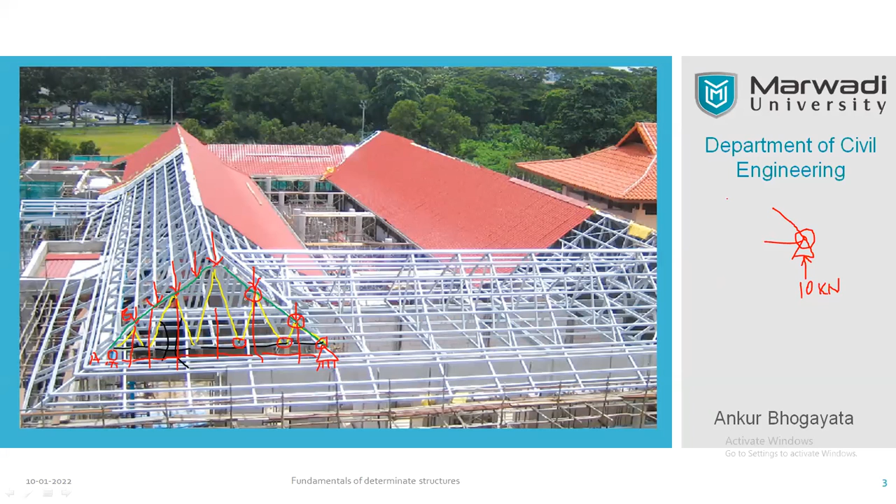So this is one joint that you develop here. Likewise, every node is a joint. Like this is a joint, this is also a joint. This itself is considered as a joint. You can go to each of the joints one by one, and that will give you equilibrium equations. And here we need to use only two equilibrium equations, that is sigma V and sigma H. One by one we can check them.

So here you can see with the geometry you can calculate this angle, right? Let us say this is 30 degrees or something, and we will convert this member itself into the forces, and we'll assume, unless otherwise stated, in case of method of joints, all members are in tension, so they should be going out from the source of the connection. So this is one member, this is another member. So now we have converted that member itself into the force.

So this is, let us say, force 1. You can name it according to the points, like suppose this is C and this is D. So you can call this force CD, right? And you can find whether it is in compression or tension. If your final answer is in minus, then you can say it is in compression. If your final answer of FCD is positive, then we can say it is in tension.

Because we all know that compression will reduce the overall member dimension, and plus will be extension of dimension. So that is positive, that is tension. So if this FCD value comes in negative, we will say that it is in compression, and if it is in plus, we'll call it tension. At the same time, as usual, when you get your answer in reverse direction, you can flip the direction of the force into the reverse direction. So you can convert tension into compression according to the answer that you have received.

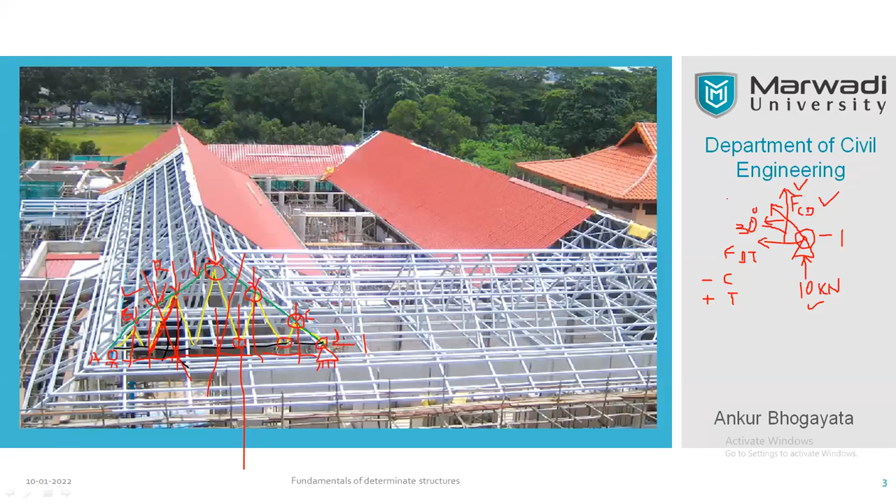So it is needless to add that if the truss is a very small structure, like only few members are there, only few joints are there, then definitely you can utilize the method of joints, because you need to address all the joints together. If the truss is large in the number of members, then specific member forces can be calculated by using method of section in that case. And likewise, we can use graphical method also. So with this introduction, let's move ahead in our discussion. Let's see how the thing works, right?

So all these are nothing but a good triangle. Let me take you to the geometrical. Since it is the first lecture, I am elaborating a little bit. So here you can see a closed triangle like this, right? Here another triangle is there, right? Here again, you can see a triangle, right? And likewise, it is symmetrical on both sides along the vertical axis. So likewise, all the members are ultimately arranged in a triangular pattern.

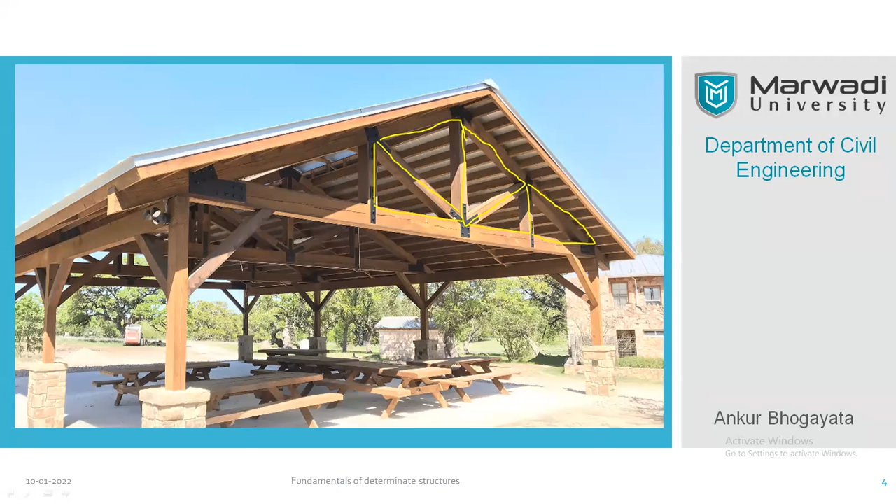So what we can expect is you will be given point loads at these locations. These are called joints. Where they are meeting, this is a joint itself, right? So at each top joint, you will be provided the point loads, and here there is a last joint, so you can expect forces here also. And then you can calculate member forces as I have just explained to you.

You can assume that one end is, let us say, supported on a roller, and the other end has a hinge support. That's why you can solve the entire truss, because then it becomes a determinate structure. So likewise, all are arranged in a typical triangular pattern. Once you have the forces, suppose you have the force in this member, you can treat this joint and get the other unknown values, like here and here. So likewise, we have to carry on. Okay. So let me change it.

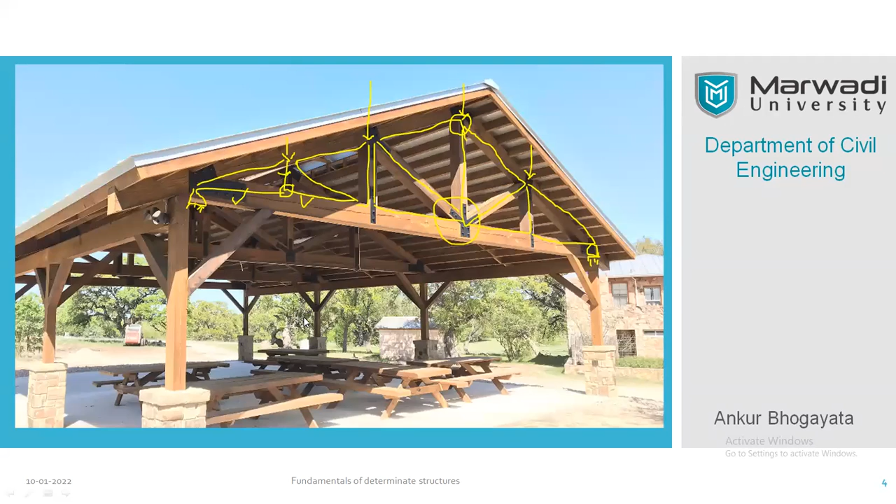So to articulate a roofing system in malls, airports and other places like railway stations, where you don't actually want vertical members to support the roof, you can utilize the truss system in an articulated way or in an industrial way also. Industrial sheds are the best example of the truss system, and you can search on the internet and find plenty of images there. So I'm just giving you an idea.

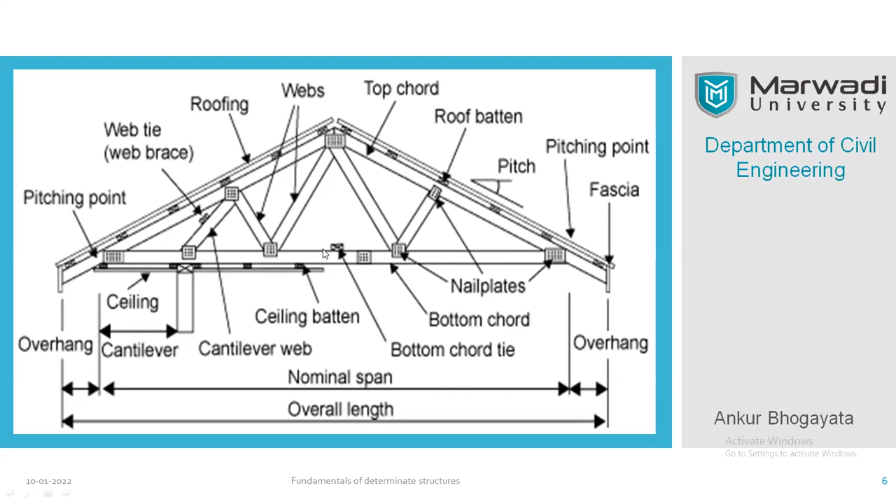So I have mentioned all the important terms earlier, like bottom members are called tie members, diagonals, and top chords. There are some other members you may find: the roofing sheet is there, and purlins are also there. These terms largely match the timber truss system. There's no need to remember all this. But I will be sharing some reading material and sketches with you, which give you a clear idea of the basic members and their names in the truss system.

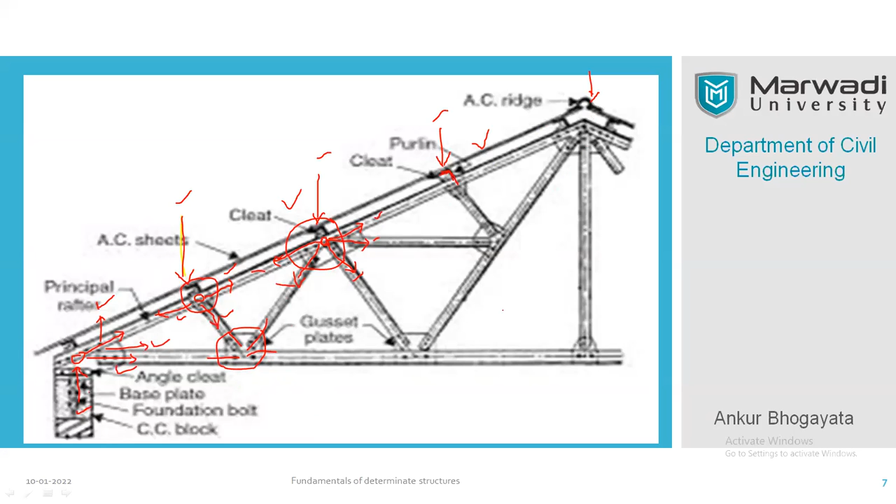So all member forces are easily calculated with the help of two primary equations, sigma V and sigma H together. This is the general idea of how we work with trusses. A truss consists of straight members connected at the joints. No member is continuous through the joint. Here you can see all are pin connected. These members have pin connections; this is one individual member, 2, 3, 4, and 5.

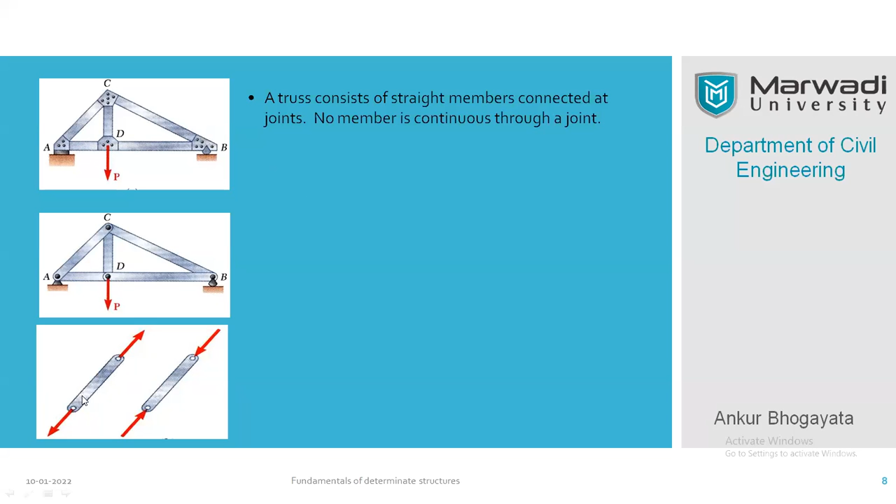You can recall when we determined internal and external indeterminacies of the two-dimensional truss system, we used the equation 2j minus 3, right? You can use that equation to check whether the truss is stable or not. And this last figure indicates how the members are subjected to tension and compression.

Most of the structures are made out of several trusses joined together to form a space framework. That means when you add some rafters, you can connect them. Each truss carries those loads which are in its plane and can be treated as a two-dimensional structure, right? And there may be bolting or there may be welding depending upon the convenience of the construction.

If you use a bolt, it will look like this, right? Just to connect these members together. This U-shaped element is called the gusset plate, and the gusset plate is used to give connecting area, and that will be used for connecting the members at a joint. If you have a welding facility, you can use it to join these two members. However, a gusset plate will also be required over there.

And finally, when the forces tend to pull the member apart, it is in tension. Like here, these two forces are trying to pull the member apart. When the forces tend to compress the member, it is in compression. So here you can see in the other figure where the cursor is moving, these two forces are compressing this member, right? So there is a combination of tension and compression together, right?

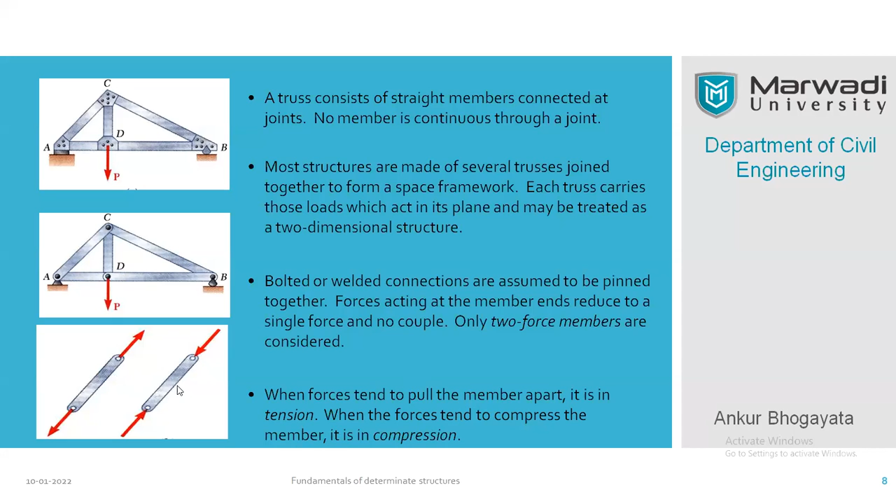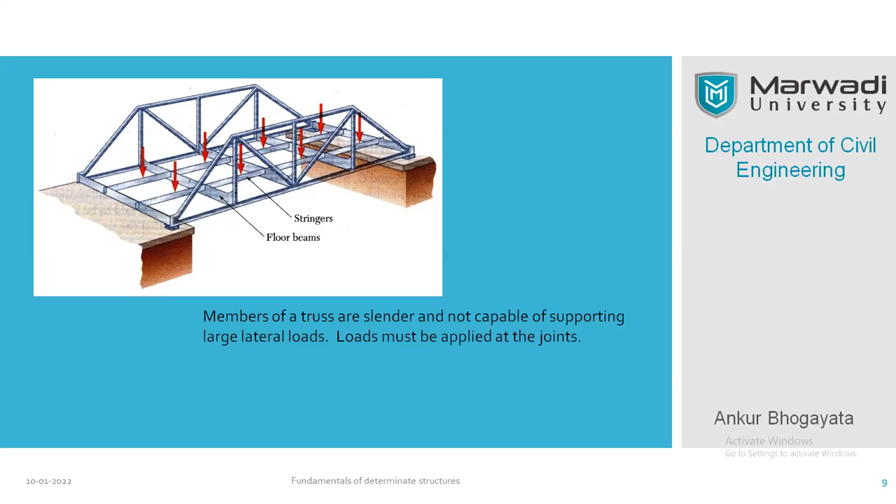Another application of the truss system is the transmission tower also. You can use it in cranes also. Several times we have discussed this. So now our focus will be how the members are subjected to various forces when you apply the point loads over there. So these are some of the examples of different types of truss systems. Each truss system is connected by pin connections, as you can see. So all these connections are pin connections.

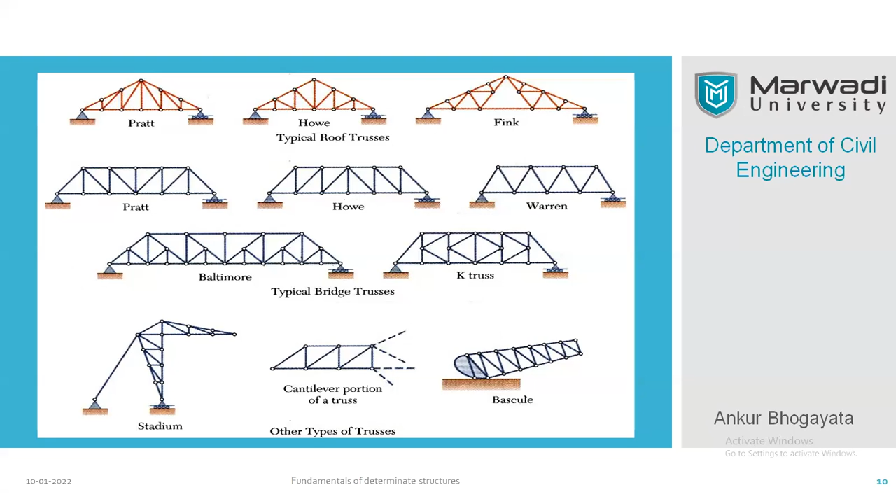So the most stable shape considered in a truss system is a triangle. You can use this triangle in a flip-flop way also, extending this geometry again and again to create members for large span structures. So there are stable and unstable mechanisms. However, we recognize this as a simple truss. The simple truss will be the point of our interest, right? So you can confirm whether the truss is a deficient truss or a perfect truss using the old equation.

2j minus 3 equals m, where here instead of n you can use j. J is the number of joints. So 2j minus 3 and the number of members, both part A and part B, should be equal; then your truss is called a perfect truss, right? And if it is not matching, you know what the other two conditions are.

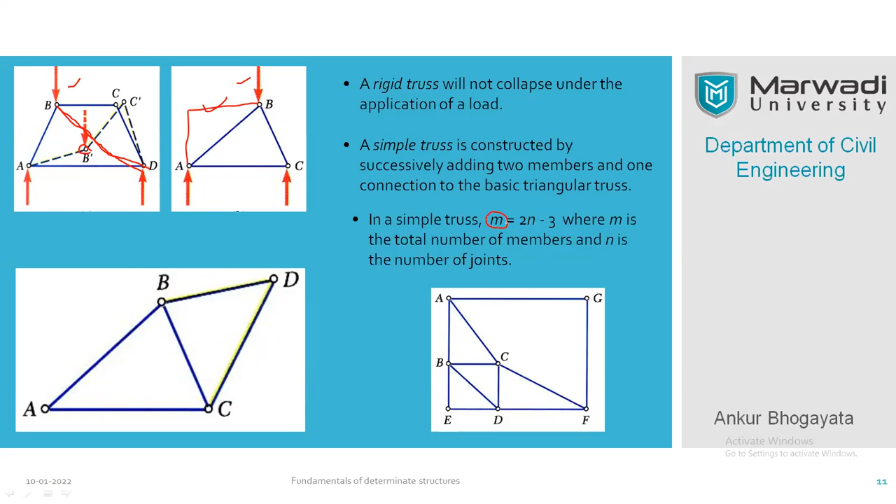If m is greater than 2j minus 3, it is called a redundant truss. And if m is less than this, then we can say it is a deficient truss or unstable truss. So that you can check before you calculate the numerical. So this is what we should start with, the analysis numerical example, which I can start in the next session. But otherwise this will give you an overall picture of how we should go for that.

There are two methods, method of joints and method of sections. Here in this case, the members are very few, so we can comfortably go with the method of joints. So first we'll solve the questions pertaining to the method of joints, and then we'll go for the method of sections. Now we know that members in the truss system are always either in compression or in tension.